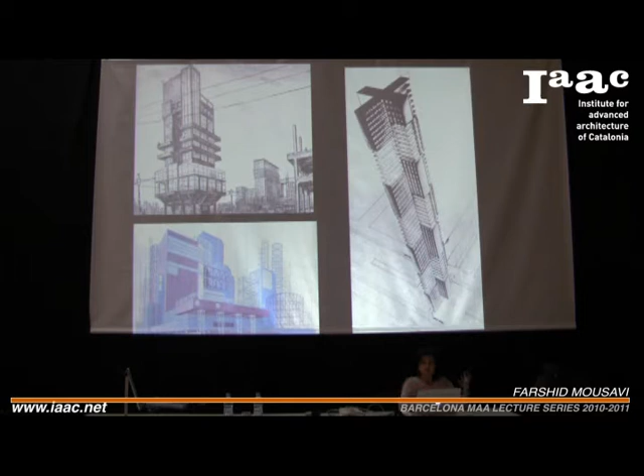However, in all of these, the new visions, or the innovations they were planning to deliver through these new techniques, were very much trapped, one could say, depending on this dialectical relationship between form and function. Therefore they were also trapped by this origin they had to depend on in order to situate themselves, and by depending on it, they couldn't really move beyond it.

So ever since the latter part of the 20th century, we have been witnessing a new relationship between form and function that is no longer isomorphic. A new generic city has been emerging, and a new kind of urbanism. Whether located in the Middle East, Asia, or the Far East, this new generic city is the product of a more prudent kind of urbanism characterized by the excitement of its architecture.

Each of its districts seemed to appeal to a particular kind of individual, whether you're facing airports, museums, shopping centers, social housing, or office towers. They are all equally exciting and spectacular, often resulting in an array of divergent styles, which also apparently has quite a lot of similarity between projects, whether emerging out of public or private or even public-private partnerships.

So this new urban condition raises many questions. Is there a common ground or foundation to all these divergent design experimentations? Are there any social or political ambitions or implications underlying this diversity? What about architects' freedom from the market, or a critique of the economic forces that drive it? How is it possible that commercial and cultural projects look alike? Have publicly funded projects lost their political vision? Can a city composed of different styled buildings standing alongside one another be considered good taste?

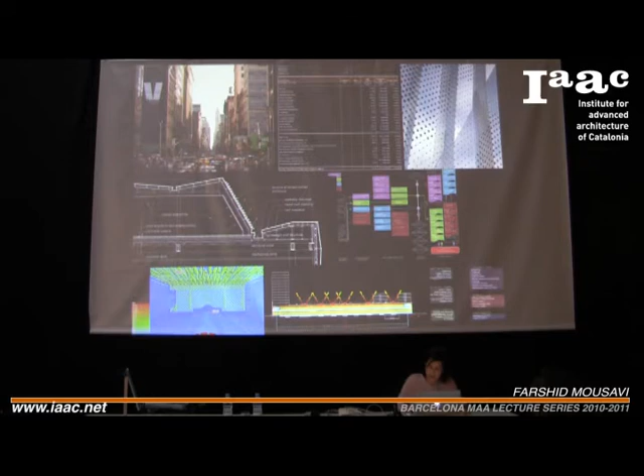So the ornament research looked at a group of buildings in the 20th century, looked specifically at their external envelope, and documented how each one meticulously chooses elements, assembles them, articulates them as a way to give them a very unique expression, and as a way to trigger, in each case, a very particular affect or sensation.

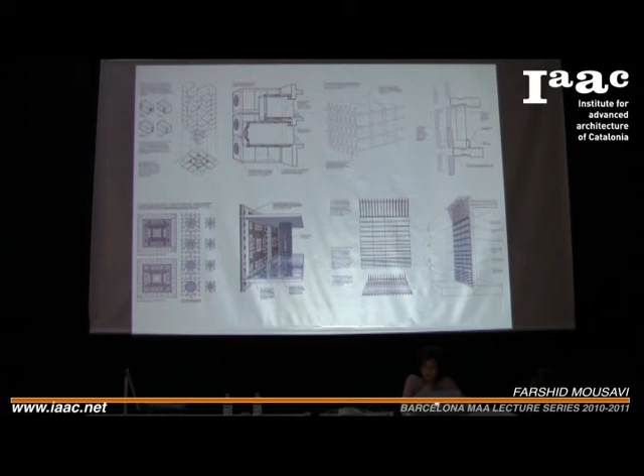So for example, here is an affect of aggregation, an affect of geometricity, an affect of heaviness.

This is one of my favorite ones, the Ricola factory by Herzog and de Meuron. A factory doesn't really require you to be particularly specific about what it looks like outside, so the means are usually very limited.

So here they take the same slats that they are cladding the shed with, and they vary the height of the bands, making them smaller at the bottom, and suddenly a shed that could have been freestanding and perhaps not sited feels heavy and connected to the ground, with a sense of gravity.

Affects of pleating, affects of tonality - this is the Laban Center.

And then the form research also tried to expand the discussion of affects beyond the optical and to involve acoustical affects, which of course, because we architects don't really know how to model them or visualize them, we don't have the tools, and we're not so consciously working with them - but of course we know that you can impact the way you feel in terms of sound in a space due to the way a space is formed.

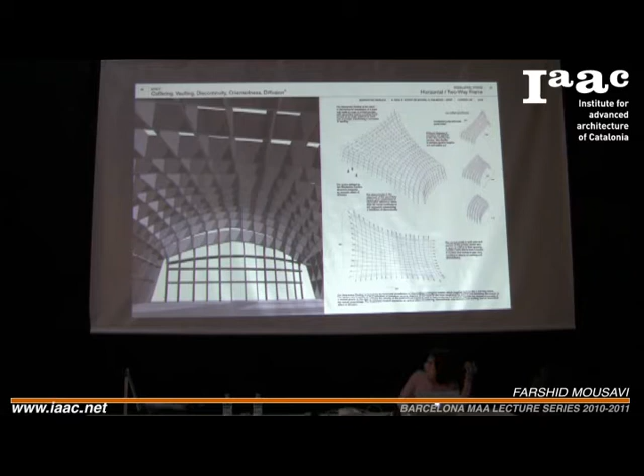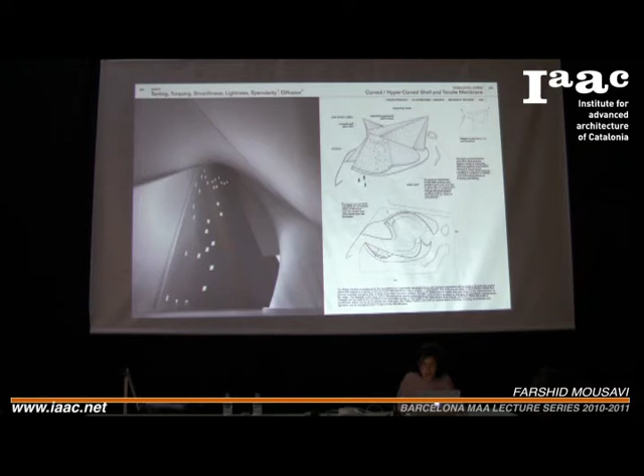So here, for example, the affect of diffusion would be present acoustically in this form, or diffusion and slowness if you were working with a vaulted system, or diffusion and specularity in the case of a tensile structure.

Now maybe we can look at a couple of FOA projects a little bit more in detail as a way to unravel the process by which we have tried to deal with that aspect of these forms - perhaps the kind of expression generating the ornament, those elements that really produce their affective nature. I'm not going to deal with the projects in their entirety, only focus on those elements that generate and articulate the way these projects express themselves.

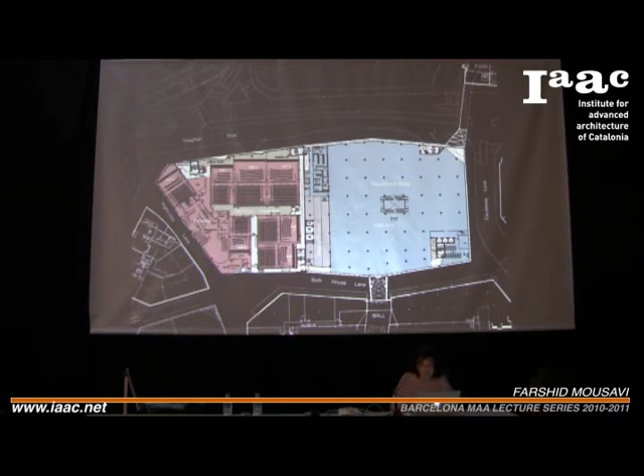So the department store comes with a whole demand of blankness. Department stores don't want to see out - they want to maximize display area, minimize visual distraction so that everybody is focused on the act of shopping. The interior comes with a series of demands like grid sizes, atrium sizes, and location of back of house - we're going to park those aside.

The question was, how can we, through the design of this project, challenge this blankness of the department store, and how can we connect it to its context?

So we thought, well, perhaps we could design this envelope as if it is a net curtain - conceive it as a net curtain that lets you see out, but doesn't let people see in so much, or at least not during daylight. We had lots of material to work with as elements to assemble our net curtain. One of them was curtain walls.

John Lewis has a building called Peter Jones in London that was the first building to use curtain walls in the UK. That's part of their heritage, and they're very proud of this building. So we thought we could convince them to use glass, to start with a curtain wall, despite their wanting blankness.

They specialize in textiles. If you want quality fabrics, especially at good value, you would go to John Lewis, so textile is part of the context of the project. The site is in Leicester, which has 300 years of weaving as an industry, and despite competition from abroad, they are very interested in keeping it.

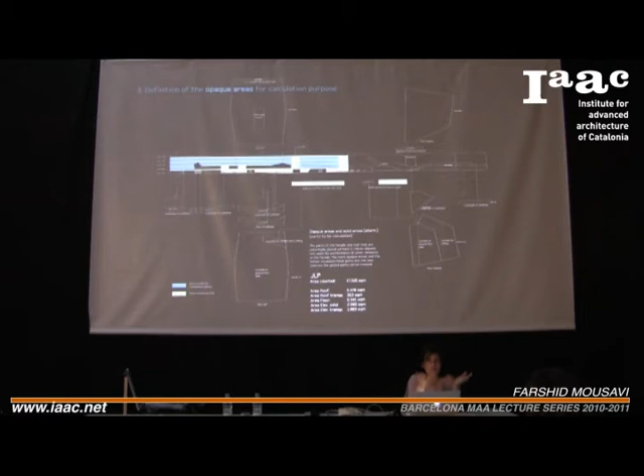Part L is a UK regulation that governs how much U-value you gain through skins or envelopes of buildings. Given a glass envelope, we had to have 40% opacity, so this scale also had to mitigate with that 40% dark or solid areas.

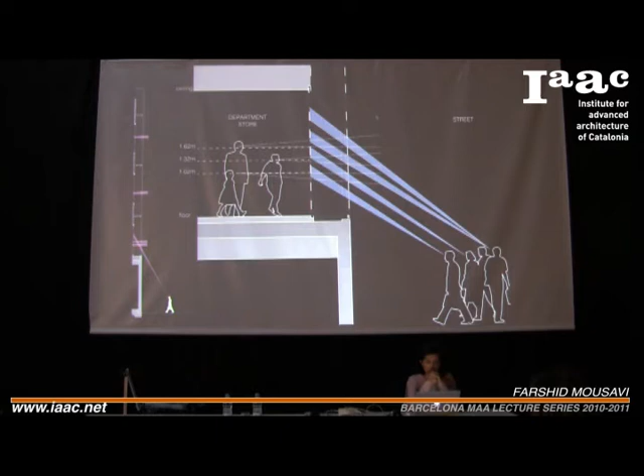Privacy was obviously one of the materials to consider. We doubled the pattern on two layers, which allowed us to increase privacy. When standing on the floor, because the two patterns line up exactly, you would see out clearly. But looking from an oblique angle from the street, the two layers fill each other's gaps, and the pattern seems much denser than from inside the floor - the more oblique the angle, the denser it becomes.

We wanted it to feel like a fabric, and we were working with fritting this pattern onto glass. We were aware there were already many projects using fritting - for example, Herzog de Meuron's Eberswalde Library used frit, but in a way that evoked brick, because the pattern repeated serially. Here we were trying to evoke the idea that this is seamless, a fabric, so the pattern had to remove its seams.

So we produced 4 templates from the originals, each varying in internal density but meeting at their edges - the solid areas align with the outline at exactly the same points, so you can mix and match them and never see the seams, even while regulating the pattern to correspond to areas like service cores you want to hide. Then there's the physical scale, another material to incorporate, since our pattern was more of a visual scale.

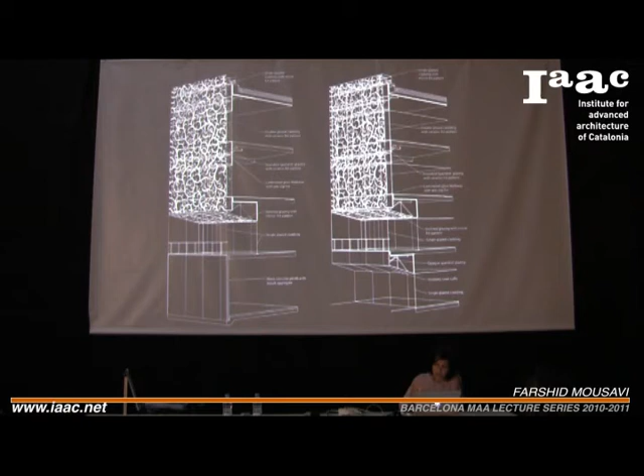Through the assembly of these different elements and materials, we get to this double facade where the mirror frit, the stainless steel, the bolts, the glass, the spandrel panel, and the catwalks together become the ornament of this building. Of course they are not part of the core function of the department store, but they've become absolutely intrinsic to how you experience it, both outside and inside.

On the outside, we experience different effects: moire at certain moments, interlacing when the light is behind, arabesquing when the shadows fill the interior - you could call this tentacular. Layering, where you see the pattern, you see the fabric of the city through the fabric of the envelope, and neither of them is really seen in isolation.

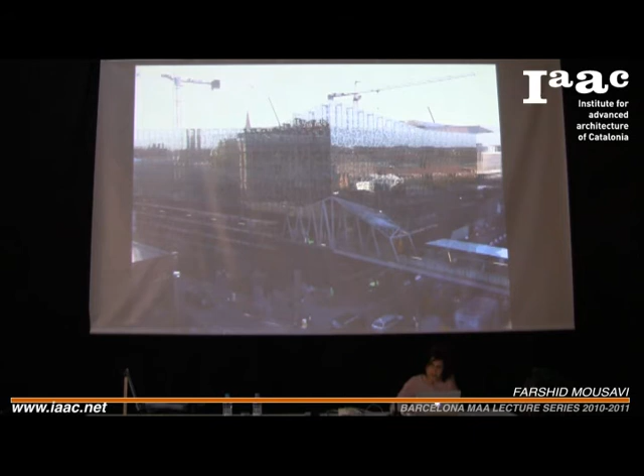Weightlessness and embroidery. Projection at times, when the sun is hitting away from the building, the pattern falls onto adjoining buildings - density, multivalence. This is my favorite image of the project, although it was still under construction, because you can almost not see where the building stops and where the city starts - where the building starts, if you like, dancing with its context.

For me, the interest behind the John Lewis department store, even though you could argue that department stores are one where the architect has less control - the inside is formulaic, you don't really have a say in it, and therefore just designing the envelope is like architects losing their influence - I would argue that's not really the case here. In fact, just through the design of this envelope, both John Lewis and this area of the city have found a new way to express themselves and a new way to engage with the public.

I am going to go quicker. I don't know how long it is. How long have I gone? I'm going to go very quickly through this project and stop.

Ravensbourne College is a project that we've finished this year. It played with different materials, again to try to articulate its expression. It's a college, it has different departments. It is by the Dome in London.

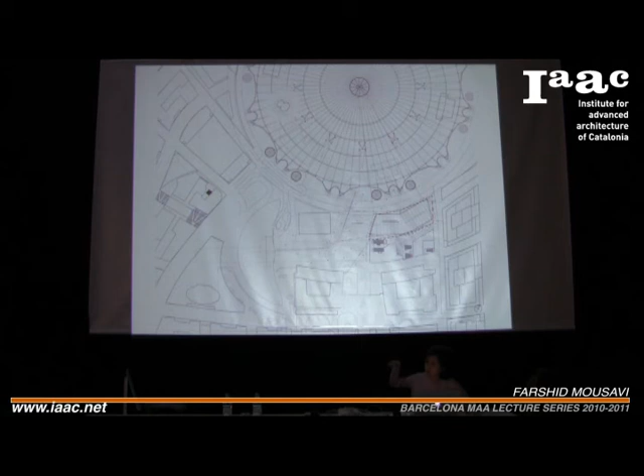Split floors are another decision you can make as an architect to explore cross-communication between departments.

An interesting history context to the college is that it is rooted in William Morris, so obviously it brings this rich patterns, and we thought it's interesting to see how these patterns are in themselves scaleless, and perhaps we could try to develop the external envelope of this building with a pattern that diffuses the presence of the floors, diffuses the presence of the atriums, and makes it as scaleless as possible.

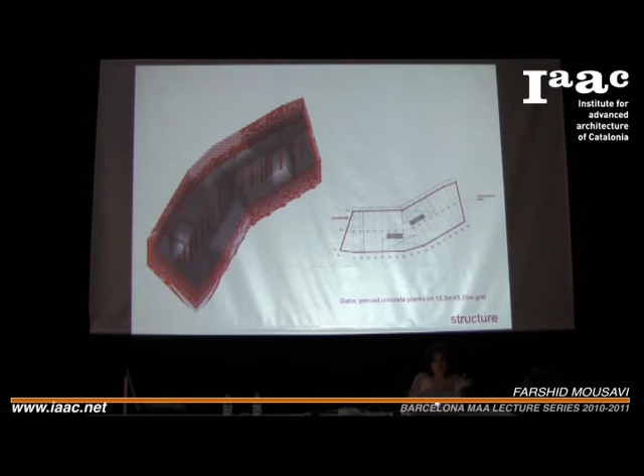So we designed three different tiles that have slightly different shapes, and they assemble to produce this pattern. They produce a quasi non-repetitive pattern, and as you keep on tessellating them, they produce openings of different sizes and shapes. Like the Leicester project, scale becomes an important issue, because though we wanted to disguise the scale of the inside, you have to also negotiate with the scale of the floor plates. You can't have them clash and the floor plates showing through these windows. Structure has to obviously negotiate with this pattern.

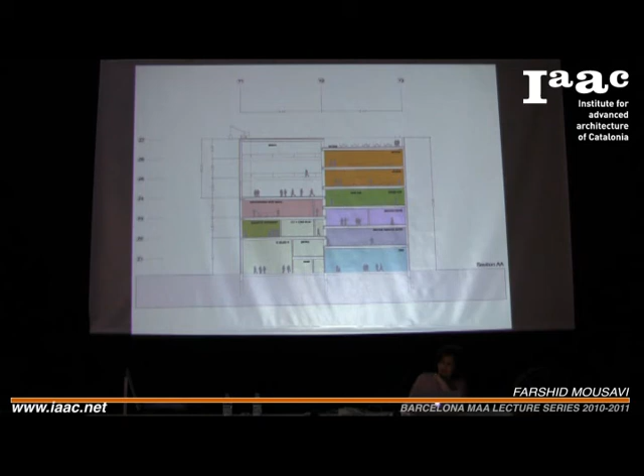Then there is all the different programs inside. The college has lots of different departments. Some of them want light higher up, some want light lower down, some want no light, some want even lighting, some want uneven lighting.

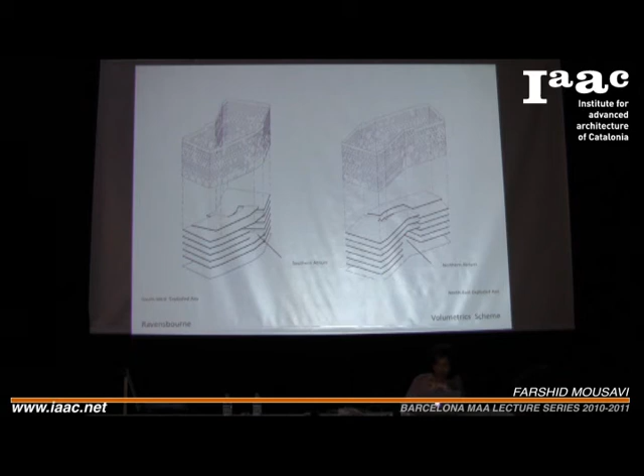So we tried to imagine a kind of template of different situations for an envelope, thinking of each department, in which we would carefully vary the pattern, the position and size and shape of openings, so that we would produce this dialogue between the form of this pattern and the functions inside. So you arrive at these areas where you see that the pattern is varying. With those same three tiles, you manage to cater for these differences within.

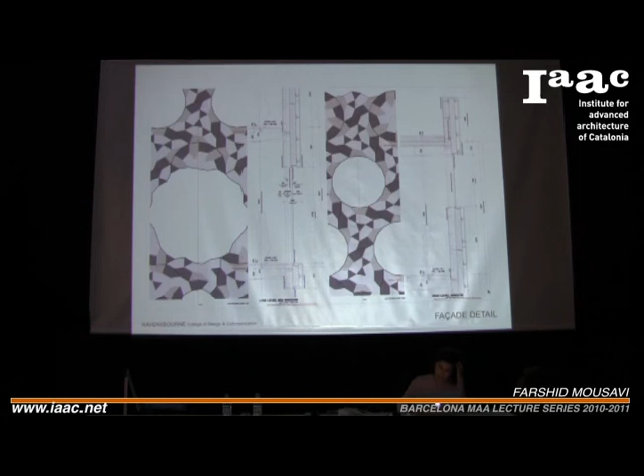As you see here, the envelope is designed so that this pattern has a certain microsectional depth with a certain technical integrity. This would be like an unfolded envelope with the colors shown, showing how the holes are varying.

Of course, then comes how do you fabricate this panel, because our visual pattern has to do with where you see the openings, where you see out, and how big the light is, and this is different when somebody comes to produce this. With little tiles, you could never assemble the building putting every single one as an individual tile. We had to panelize it.

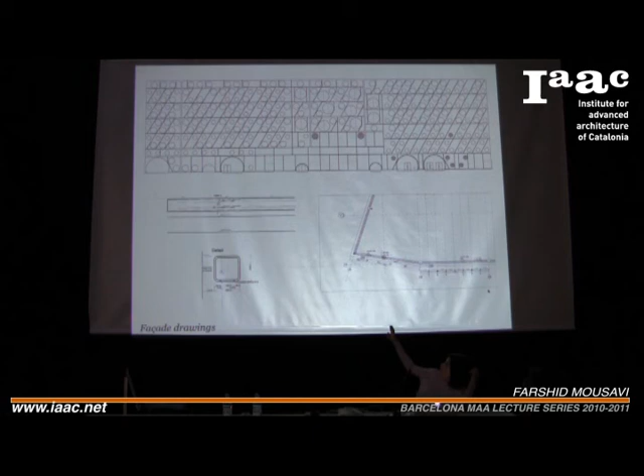So we get this situation, maybe a colored version is easier to understand, where we get these diagonal panels that are consistent with the pattern, that come to site and get assembled very easily. The system is such that the tiles are hooked onto these panels.

So the question was, again, how do we panelize the tiles that are placed or hooked onto these panels? We went through initially thinking our panels are made with an opening inside, so we would have this palette, but it ended up being about six of them.

Rethinking it, we came to this, seeing the pattern with different functional criteria in mind. If you look not at the openings themselves but the solid areas, you find these rosette kind of shapes that allow us to have fewer types. Through just having this range of rosettes, we could assemble the tiles that finish the envelope with these pieces that, through the way they aggregate, would automatically produce the openings.

You see them here, and of course there are some odd corners, etc., that give you more. So they come in, you know, in these big panels.